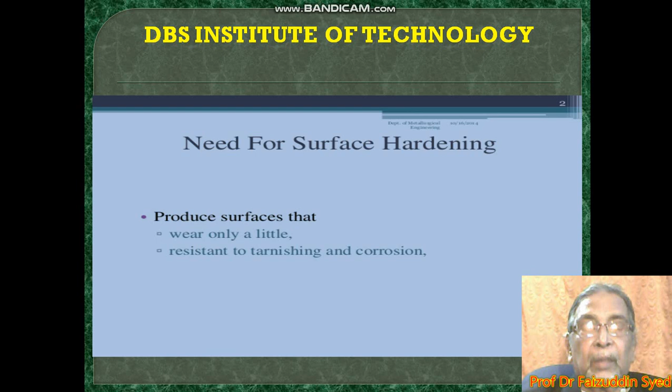Thermal spray coating. This is one of the methods of surface engineering. A group of coating processes where the coating is deposited on a prepared substrate by applying a stream of particles, metallic or non-metallic, which flatten more or less, forming platelets called splats, with several layers of these splats forming the coating. You can spray almost any material on almost any substrate.

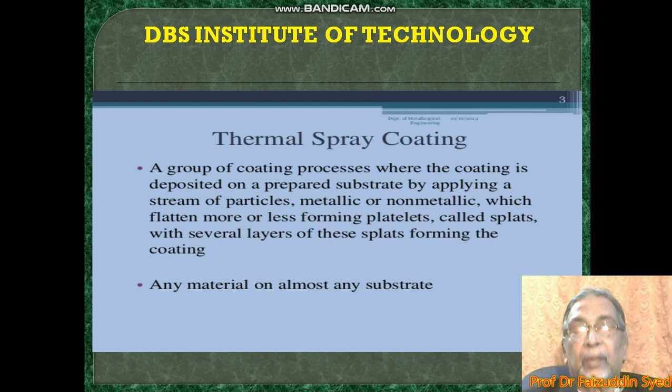The spray coatings. The spray coatings are either axial or radial consumable injection in a high energy flow resulting from combustion or high velocity gas streams. You can coat thicknesses from 50 microns to a few millimeters, and you can do the bondings on substrate surfaces where undercuts and simple roughening will be there.

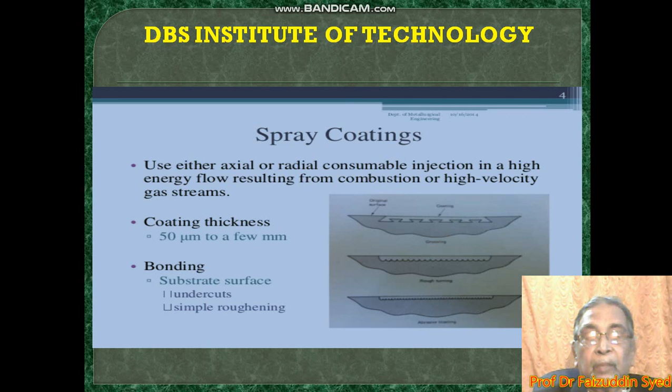What are the components and equipment you need for this process? You need an energetic gas flow, an appropriate gun, and the devices for feeding, accelerating, heating, and directing the flow of a thermal spray material towards the substrate. So all this equipment we need. You also need feedstock. This is the material that you are going to use in the spray. You can use powder, wire, rod, or cord. You will have to feed this feedstock at a velocity allowing the spray gun to melt it.

Then you need an auxiliary gas feed. You need gas feed to accelerate the atomized molten material into the spray gun. In the spray gun, the material is atomized. It becomes very small particles. To move it further, we need a gas feed.

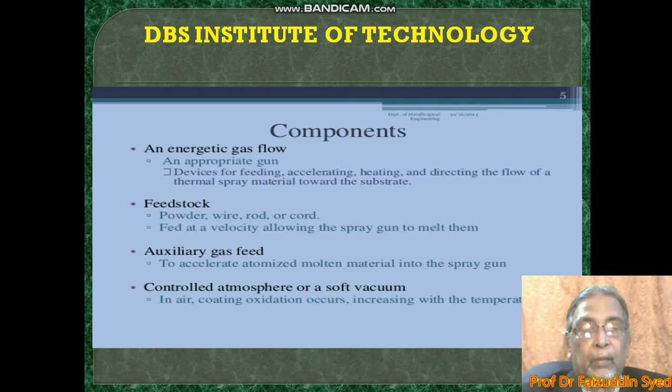The substrate, the job. The job should not be degraded by heat. You may be thinking that just by heating the job, the spray will go and attach very fast. But when you are heating the substrate, you are degrading the job. So what can you do? You can make the substrate more rough for good adhesion. You can do abrasive blasting with aluminum oxide, up to 2.5 microns roughness as optimum.

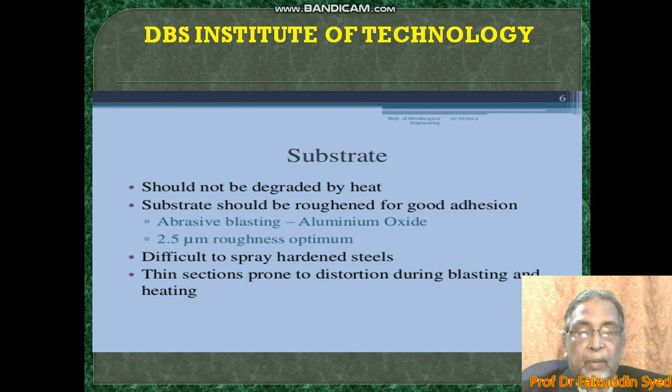It's difficult to spray hardened steels, so the spray may not be able to attach perfectly. Thin sections are prone to distortion during blasting and heating. Suppose you want to spray on thin sections, they may get distorted when you do abrasive blasting. So you should take more care in these operations.

Now you are seeing a plasma torch spray gun. On the left side there is a plasma torch. This plasma torch gun will spray onto the job which is on the right side. You can see here the generation of the energetic gas flow which is moving through the plasma gun to the job at the right side. Then you can see the energetic gas particles interaction inside the spray, and finally these particles are flattened and splats are laid over the job here.

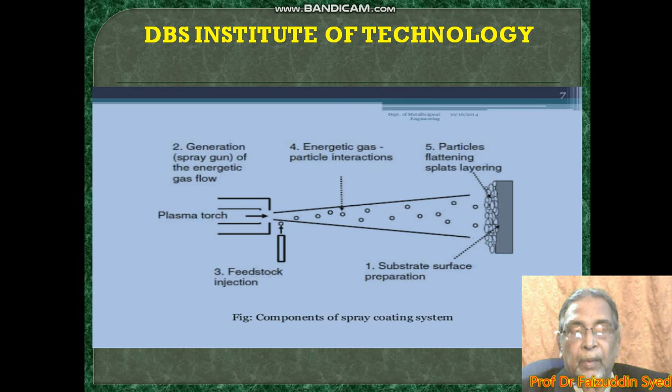You can see number 3, that is feedstock injection. Here you can supply a continuous wire for this plasma torch. It may be aluminum, steel, zinc, or any wire you can use here.

Now you can see the steps in spray coating. One, substrate preparation. Two, generation of the energetic gas flow. Three, particle or wire or rod or cord injection. Four, energetic gas particles or droplets interaction. Five, coating formation.

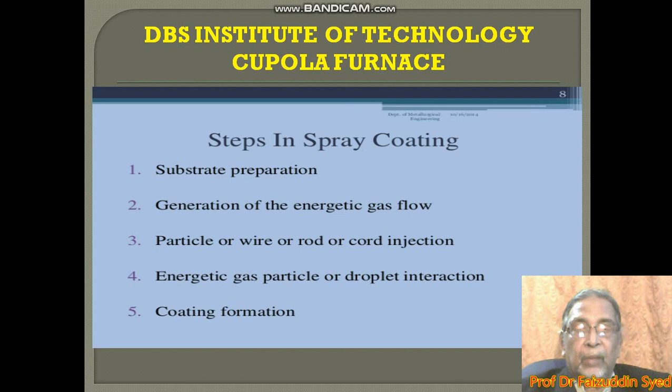Now we can see the thermal spray hardening processes. The gas combustion, oxygen fuel process, in which we are using the gases oxygen and acetylene or LPG. Then you have wire feed, rod feed, powder feed, and detonation gun processes. Of course, at a time you cannot use wire, powder, and rod together. You can use only one, either wire or powder or rod.

The arc process. What is the arc process here? One is plasma arc with powder feed, and the other is arc spray with wire feed.